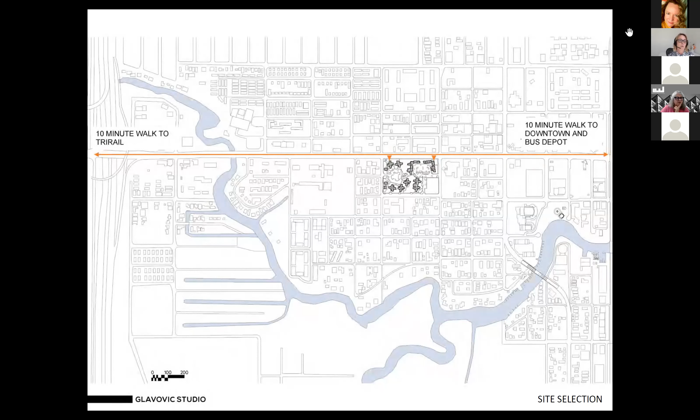Next slide please. In general, our approach to this project was to start with a potential modular design—we actually designed it in concrete modular construction. What was important is, as you'll see, it's about a 10-minute walk to downtown and about a 10-minute walk to Tri-Rail on the west. It's on Broward Boulevard, which is a key connector to the city. Our approach was: how can affordable housing be an exemplary example of how to do urban planning, and how can affordability be not a bad thing, but a good thing?

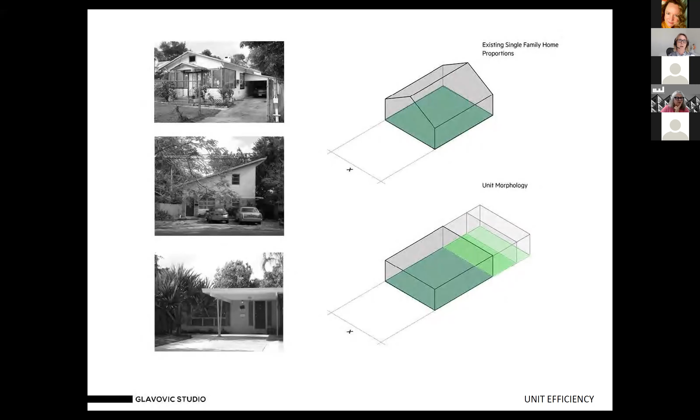Next slide please. I'll show you a few slides of how we approached this. With the sensitivity necessary to develop this project within a historic district, there were also multiple scales we had to look at. We studied the existing typical house in Sailboat Bend and took the width of that, which became the module for the unit. The single unit you see in dark green evolves to a 2-bedroom unit in lime green, and then light green for the 3-bedroom unit. So when we're talking about affordable housing, we always have to contemplate efficiency.

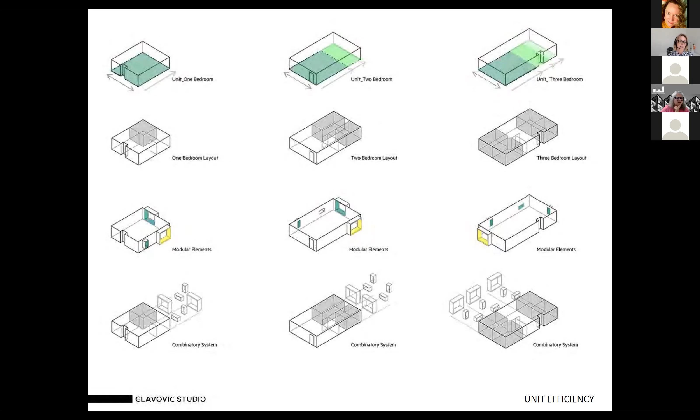Next slide please. You can see how those units could be developed further into other series of modular elements—for example, balconies, window surrounds—and all of these also needed to address extreme climate challenges. The ultimate resiliency of a project is dependent on all of those factors. Next slide please.

One thing we try to keep front and center in all of our projects is the resident—there may be children, seniors, or a young couple in their first home. This is really important because a lot of the conversation around affordable housing tends not to reflect on the humanity of the individuals who need this, who are throughout society and part of us all. Next slide please.

Kennedy Homes ranges from 5 stories to 2 stories. It was really important for us to understand how local construction techniques, keeping the costs down, could be employed to leverage a beautiful project that is a place we would all want to live in. Well-designed architecture is another metric for affordable housing.

This is how we achieved it. What did we have to do to ensure that it was affordable? Well, keeping things below 5 stories, a range from 2 to 5 stories, helps because of the elevator and all the requirements that come with mid to high-rise construction.

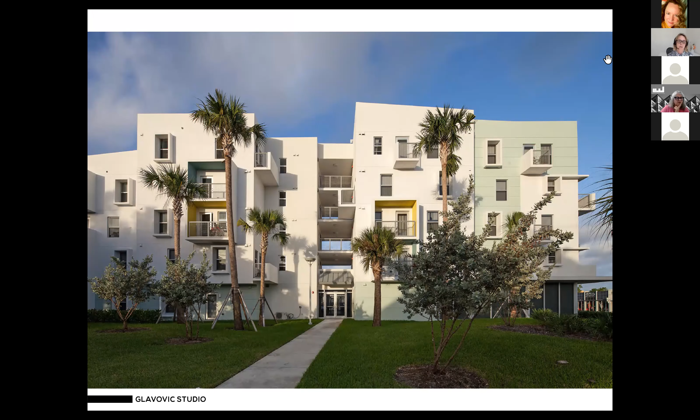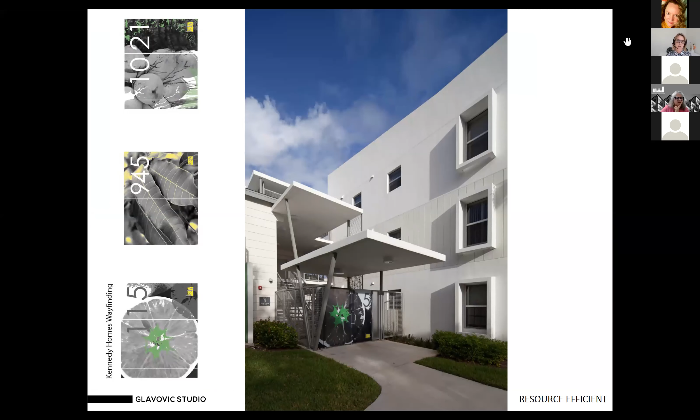Also important was not dismissing or understanding our connection to our roots. We were influenced by Charles McKirahan, a local architect from the 1950s, wanting to celebrate that style while ensuring cross ventilation and open breezeways. These were achievable by using local crafts and construction industry practices, as well as keeping the density of the units in clusters.

I'm going to now talk to you about South River Plaza, which is a larger project that is not built but went through the DRC process. Why would this be a strategy for designing affordable housing and architecture?

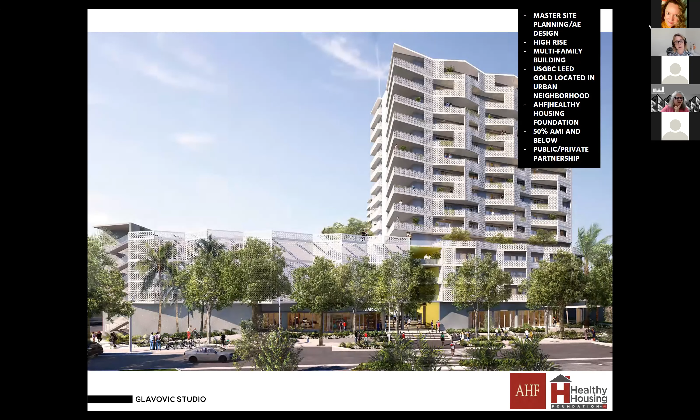Well, we needed to do a certain number of units. It turns out when you do a high-rise project, the costs obviously go up. Therefore the quantity of units was also important, as well as the imperative of looking at what the needs are in any place.

It's important that, and I reference this on each of these slides, I want to give credit to our colleagues, our design partners and owners.

This urban mixed-use campus was located sensibly south of the river and on a transit corridor, which meant folks could walk to work, could walk to shops, and parking wasn't going to be a major requirement in this project.

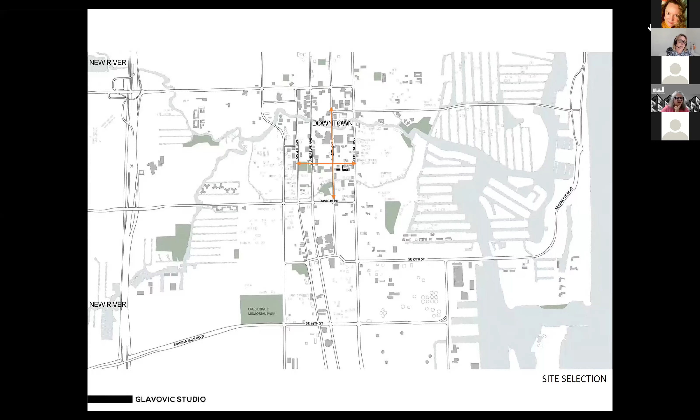An important component in our projects is the micro unit, which we're all familiar with now. But along with that comes the challenge of very interesting architecture. So we try to be very efficient and think of all the components within the unit as modules within another module.

This design turned out not to be able to be competitive with doing modular, volumetric modular in South Florida. So instead we designed a kitchen and bathroom prefabricated module that could be site installed and completed, which accelerated the process.

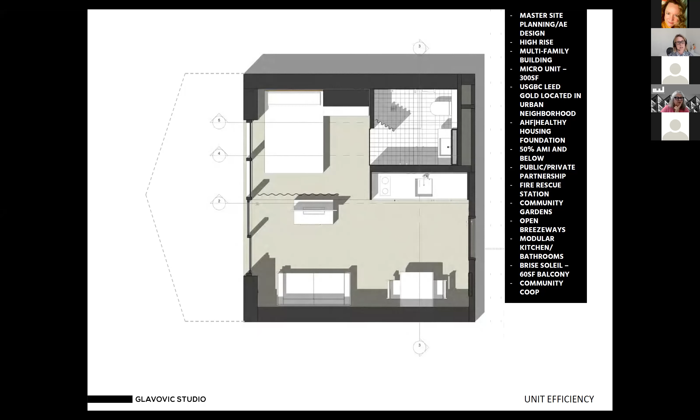Also, as we discussed in Kennedy Homes, another element really important to us is understanding where we are. And well-designed architecture, as we all know, actually yields lower costs to the resident.

Housing security is fundamental in developing and designing affordable housing. It's a strategy that can reduce the long-term costs and rent costs, as well as electricity bills. So using the brise soleil and having balconies that shade orientations on west and east facades becomes essential.

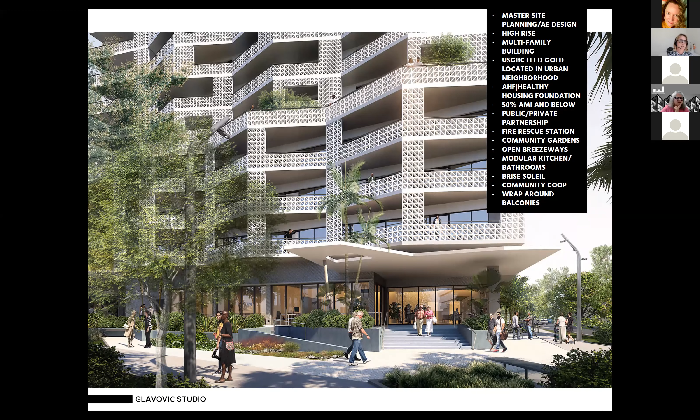Another component helpful in reducing the costs of these projects was developing a public-private partnership with the city where other needs are met. In this case, there was a fire rescue station and a co-op grocery store that contributed to the overall quality of life of the neighborhood, which was an important element to be a part of.

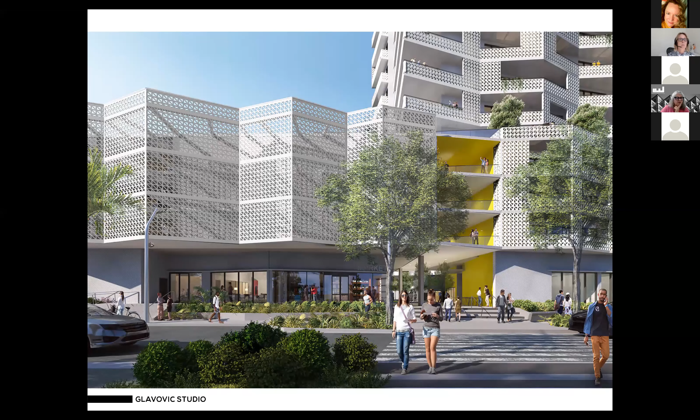A project we're currently working on in the city of Miami is using a very specific task force approach to the entitlement process because of its challenge to both the costs and viability of a project, as well as the diminishment of access to housing quickly due to these complex processes. This is a 12-story project that is essentially 4 stories of parking and 8 stories of residential units, and very efficient. I'll show you a little more about that.

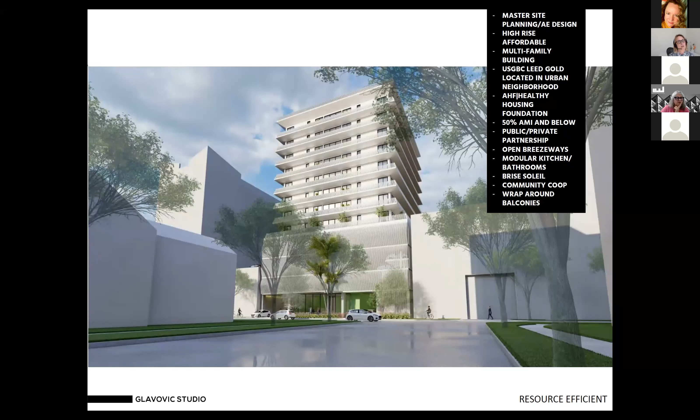It's located in Edgewater. It's an urban infill project. And I think urban infill is another area where, when looking at site selections for your clients and owners, you think about how we can do the other type of architecture that is not the massive development.

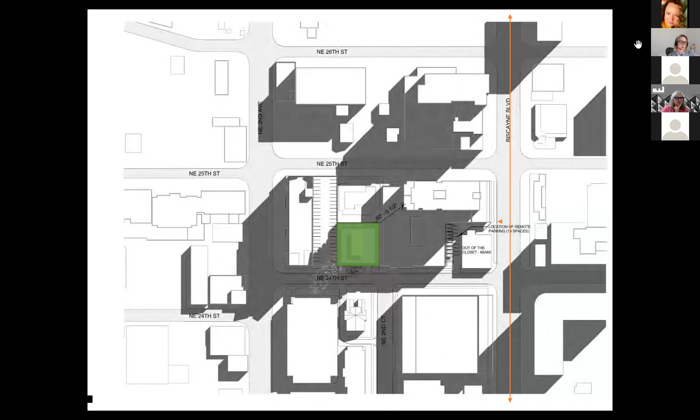What happens, though, is that we are constrained, as you can see in this green square, by the limitations of a quarter acre site, which has to have parking for affordable housing and isn't in a transit-oriented development corridor. So there are many regulatory environments that need to be advocated for change in order to ensure you don't slow down your entitlements process to achieve the required site plan approvals.

Again, the utilization of the micro unit, a repetitive module where everything is stacked and is efficient, still affords someone a full kitchen and bathroom and place to sleep and live. In this case, we also have wraparound balconies to ensure we have coverage and solar protection.

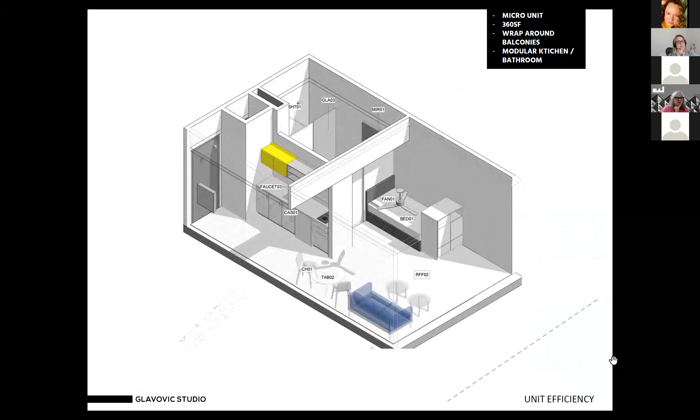The last project I'll talk about is one we're currently working on, two of these actually. This one in Los Angeles is a high-rise volumetric modular building that is highly efficient. The entire tower is all out of modular, about 90% modular with about 10% conventional construction. This is a way to expedite the process of construction. It really increases the quality of the projects as well as reduces our carbon footprint through minimum waste production.

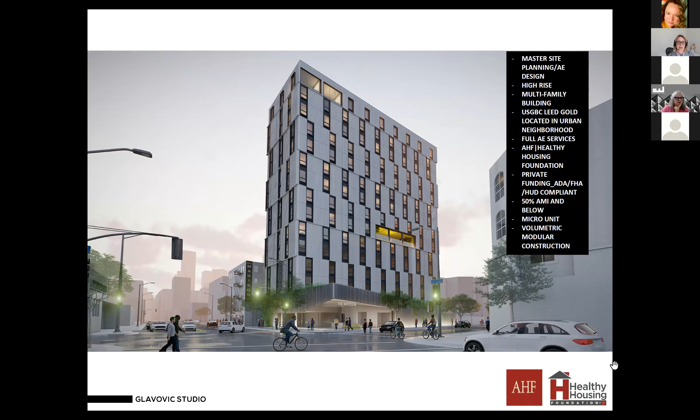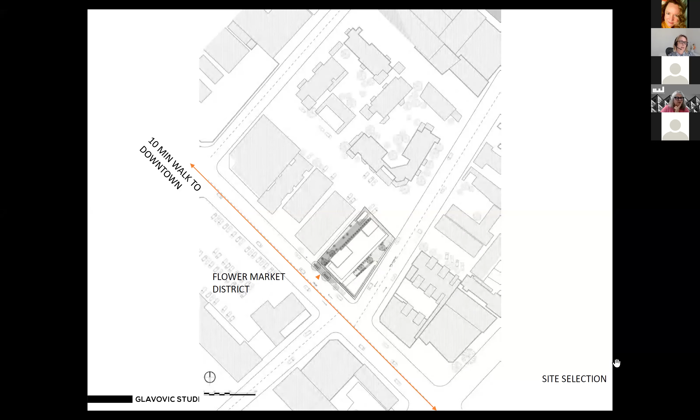This is also located on an important transit corridor for site selection. It is a walkable area. It's in the downtown Skid Row area, which many of you might be familiar with, which is the epicenter of the housing crisis in the city of Los Angeles.

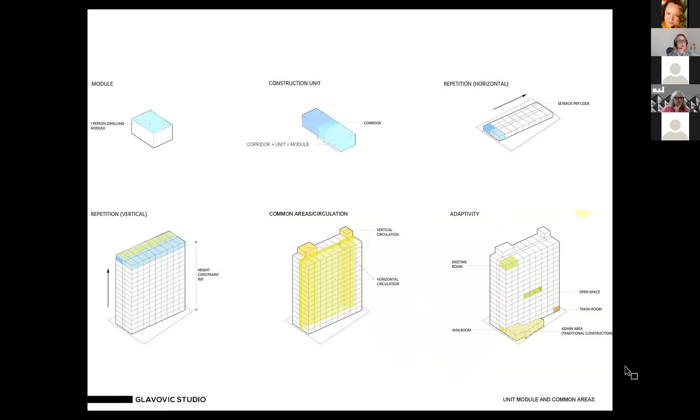Here you can see the unit iteration and how it evolves. Essentially, it's a product, and when designing in modular, the product then has to be very efficient. It's a steel frame chassis where components are introduced all in the factory. In some cases, part of the outside of the facade is done in the field, or it's developed from the factory.

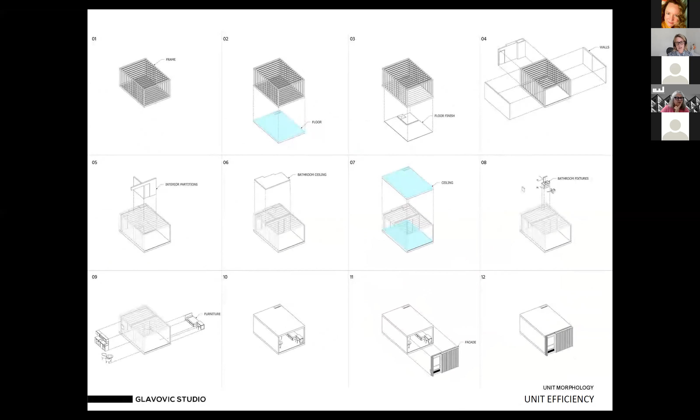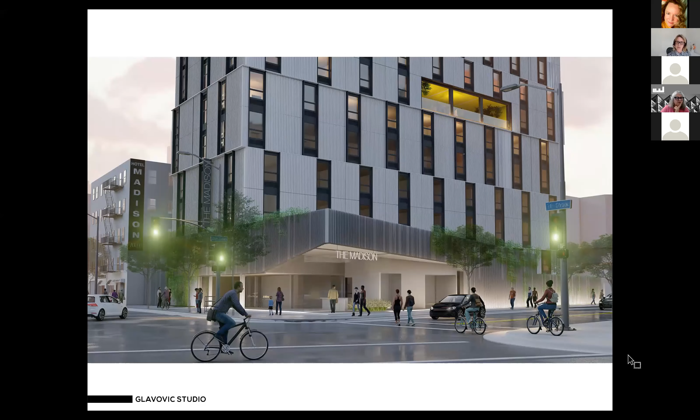The last element I want to address is we've developed a task force approach working with council members and their staff in order to expedite the entitlement process. That is an extraordinary way to reduce costs, and we're also working to reduce fees. Thank you so much. I'm happy to answer questions, and I look forward to listening to my colleagues.

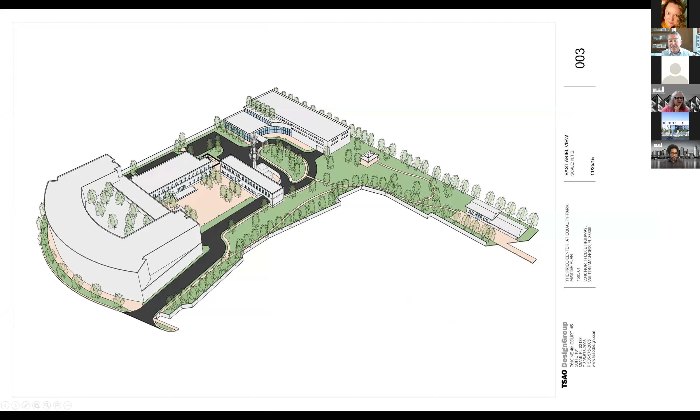So we worked with Carrfour. We interviewed several developers to assist. Carrfour, of course, another not-for-profit organization that has a lot of experience in Dade County. This was one of their first projects in Broward County.

So then in 2019, after much design, at this point I was actually on the board and was brought on to assist with interior design and basically act as an owner's representative, because I was the only one on the board who knew anything about architecture and design, to assist Pride Center and Carrfour in the development of this project.

It's fairly unique because, as you saw, the project is on the Pride Center campus, so there is some shared uses, shared entry, shared parking lot. It made for a very unique experience for both Pride Center and Carrfour, because we were a very active user. Construction began in 2019.

And then in 2020, we accepted applications. There were 48 units that were built, and we received over 1,500 applications. So unfortunately, there's still a huge need in this community for affordable housing, but we're very happy that in December of last year, our first residents moved in.

So you can see in the background of this photo, the housing is on the left-hand side, our existing Pride Center office space, and some community spaces on the right-hand side.

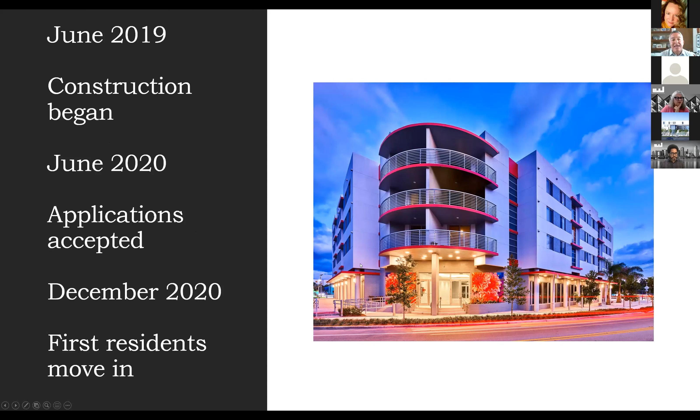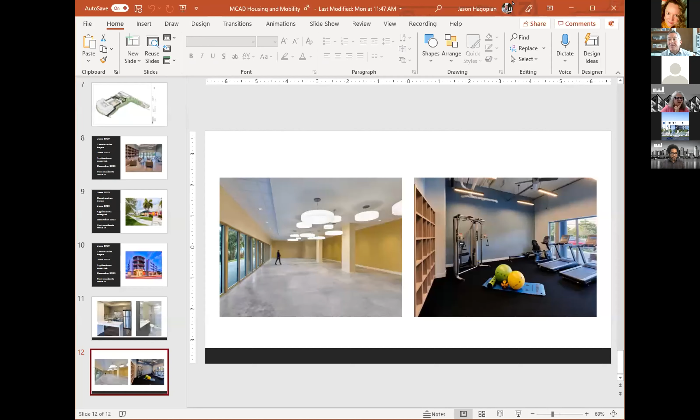I like to think that part of our success was because we didn't really know much about public housing, about affordable housing, and how to build it. We were able to really push some of the limits that may occur in more normal, common public housing or affordable housing projects, because we felt like this was our housing project, here on our campus. And we're very proud of what has been created.

I hope that we can inspire other communities to find ways, if it's a passion project and you want to see this kind of development in your community, you don't have to necessarily be an expert at it. You do have to surround yourself with people that are familiar with this kind of project, but always present challenges. We were constantly pushing the limits with this project in order to get a project that suited our community.

And I welcome any of you to come up and see the project and what we created on our campus, from a group of people that really knew nothing about this type of a project. So thank you very much for your time.

Thank you, Jason, we may need to hold you to that. Just wanted to jump in and say we may need to hold you to that invitation to come and check it out. Well, we would love that.

I'm also going to talk about another project called the Nest. I don't know, there seems to be a theme there of this avian variety, but the point is these two projects—one in Miami Beach and the other in Los Angeles—really come to a head in trying to promote many different aspects around the idiosyncrasy of a community, but also to find better ways to achieve affordability and celebrate high design.

So the first project is the Heron. It's done with the Housing Authority of the City of Miami Beach—as I mentioned, Mike O'Hare is actually on here today. It's on Normandy Isle, and it's for 20 units of senior affordable housing.

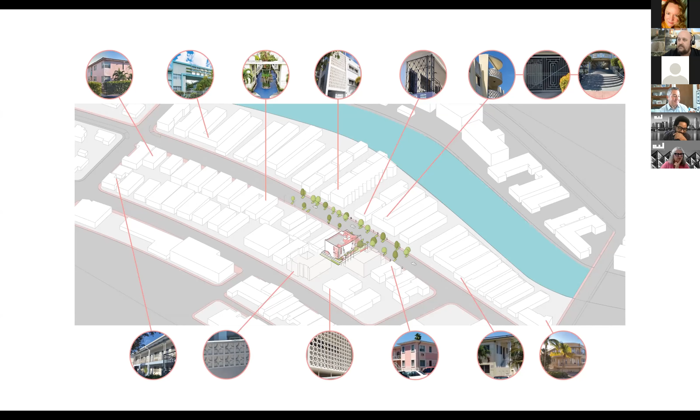We were really inspired—again, just as Margie talked about—by wanting to understand the community and its aspects. We were inspired by the MIMO architecture, Miami Beach Red, and other components, thinking through how to pull in the architecture of the surrounding landscape and integrate it into a sense of place. Because after all, that's what we're trying to do—it's not always place making, but amplifying a sense of place through place keeping and place building. We learned a lot of key lessons from the architecture around this particular project.

Zooming in, the project is on Marseille Drive—20 micro units of elderly affordable housing. We were also very inspired by the breeze block architecture of that MIMO style. This is a simple 4-story structure in the historic overlay district, which gave us several challenges to work through. We're not actually required to have parking, but we did integrate some parking into this project. Essentially all the living quarters are on the 2nd, 3rd, and 4th floors, as well as a community room at the upper level.

This is essential for us because we're having to reconcile a few things. One, we're in a historic district, but also we're trying to deal with challenges around sea level rise, climate change, adaptation. We all know what happened in Hurricane Irma, and this was the incredible lesson from the Housing Authority: this project must operate as a resiliency hub for the individuals we are serving. They need to be able to stay in place and live out the storm.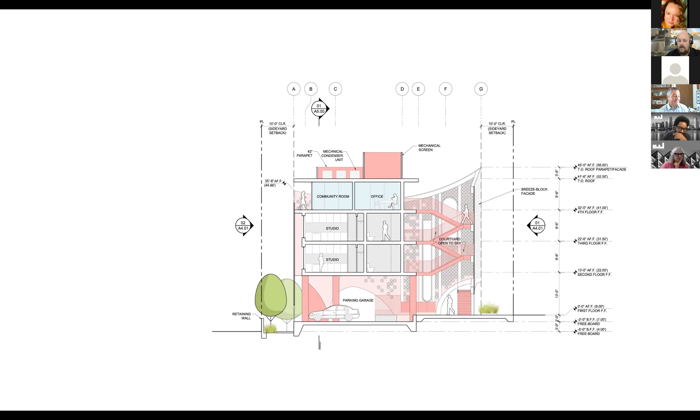As well as begin to integrate it around even potentially after the storm and a lack of power. So we're integrating things like backup generators, but we're also designing this to be passively ventilated through the easterly breezes being harvested through the project.

So this is just an overview looking south back at what that project looks like from Marseille Drive, an image of it from the front side along Marseille Drive.

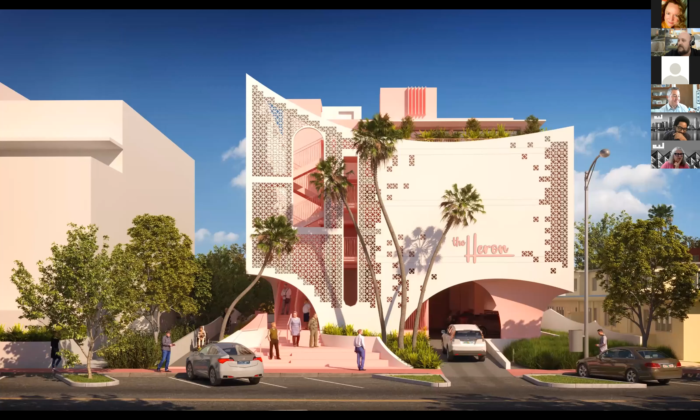So again, even though we're not able to really pull things to the ground level for community spaces and other things, we create these urban stoops, a porch where the elderly can really hang out. And then it moves up to an upper roof terrace at the 4th floor.

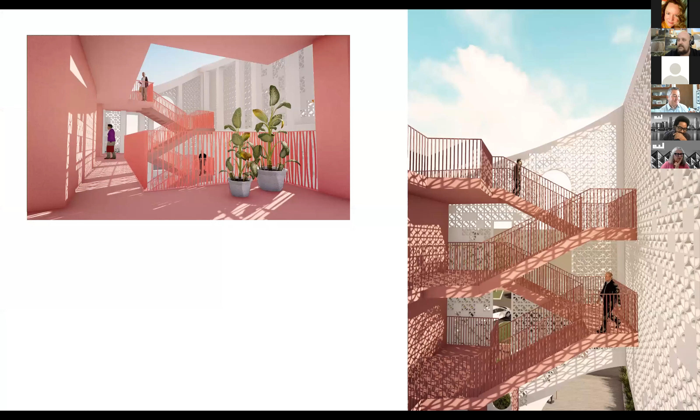And again, you can kind of see that inspiration from MIMO architecture. So this is a view looking at the northeastern corner of the project and that breeze block wall, and some interior views of the common spaces moving up.

Another project I'll briefly touch on today: a few years ago, Los Angeles County came up with a homeless initiative, housing innovation challenge. It was a $4.5 million project put out and pitched for great ideas and collaborations amongst architects, nonprofits, and anybody figuring out how to create a game-changing solution to combat the issues around homelessness in Los Angeles.

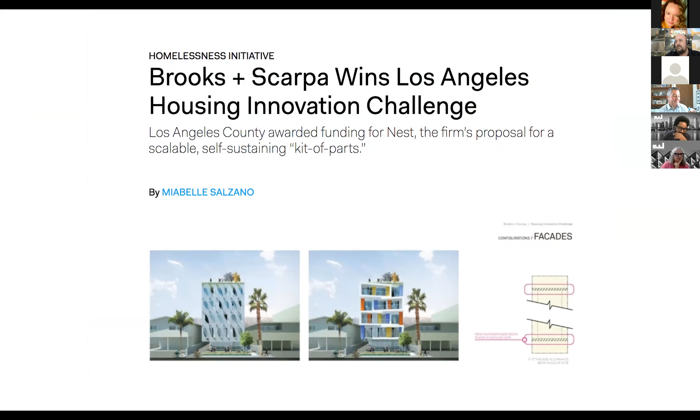We were actually one of the selected firms. We went ahead and worked through this, and it was based on what we called the Nest Toolkit. What we wanted to do was develop a kit of parts. As I mentioned, we have the Heron in Miami, the Nest Toolkit. We're developing 4 different prototypes out of that.

As Margie was mentioning about these already pre-manufactured elements, these pods, if you will, are a product-driven element. So we had 4 of them: the Blue Jay, the Dove, the Osprey, and then these shared space ones. Each one of those gave certain levels of whether it be transitional housing or more permanent housing based on those needs. It was a really complementary toolkit to strategize and begin to think about how we deal with this issue of affordable housing.

Our partners were the Community Corporation of Santa Monica and Plant Prefab out of Los Angeles. So the first thing we did was begin to look at the ubiquitous lot structures in Los Angeles. Quite frankly, we have the same here in Miami, in the Miami-Dade region. But these 150-foot by 50-foot lots are pretty ubiquitous.

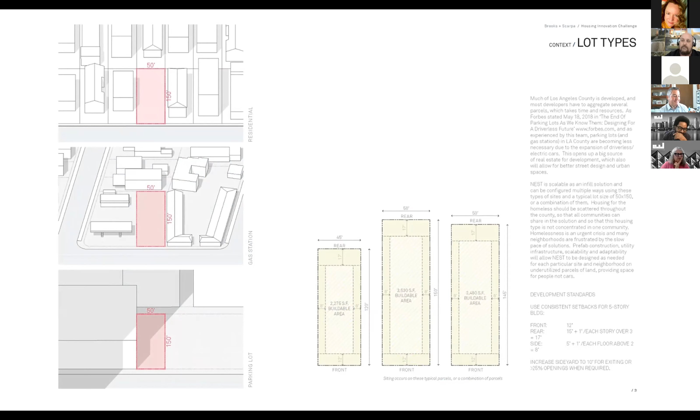We were looking across all the types of cities across Los Angeles County to really develop the best way this prototype can fit, because this is a product that can be rapidly deployable. Anybody can purchase it on this website. But we were looking at single lot, double lot, mid-rise, so you could stack these up to 5 stories tall. These products can go on mat foundations, and there's some other great aspects.

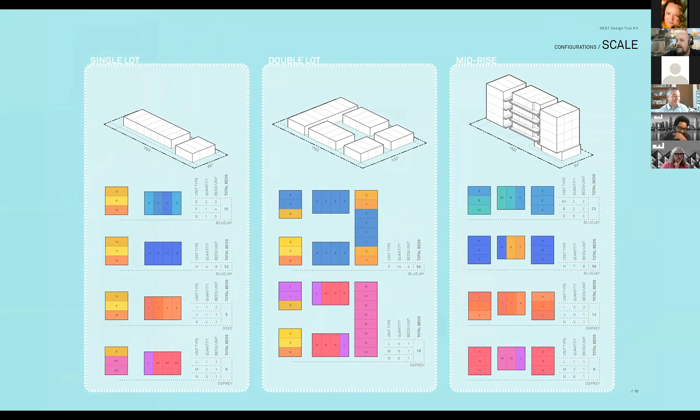When you're starting to think about that modularity in the affordable housing market, we were looking at how it could be deployed into commercial zones, but residential zones. It could take up parking lots, infill lots, or even that mid-rise condition.

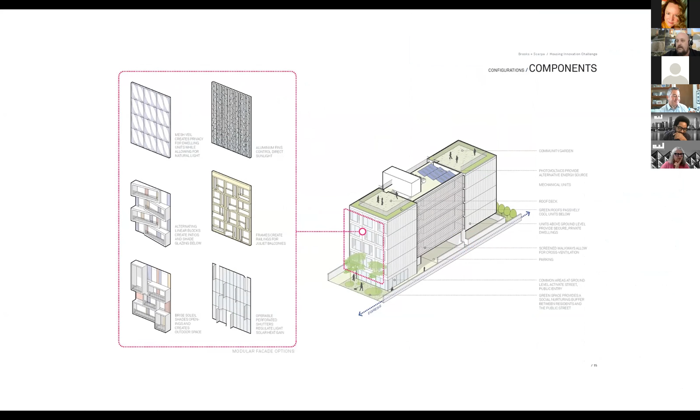One of the things we know is, since it's modular, it can then be modified slightly to take on certain configurations and characteristics for what those facade options could be for our clients and other individuals there. This is just showing some of the options and possibilities of this system, some of the possibilities and options for the facades.

So now what we're really trying to do is Plant Prefab actually offers this. Anybody can go to their website and purchase these modules and bring them onto their site, and then begin to build out some custom features, in this case particularly the facades, and work through that.

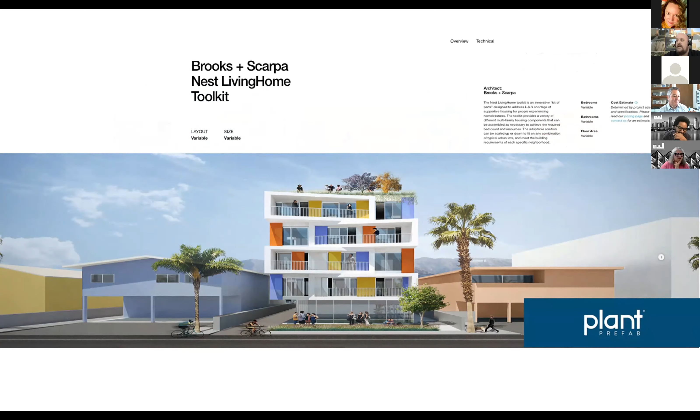Interestingly, Los Angeles has pretty much single family zoning across the entire landscape. They don't have a lot of higher density zoning. So one of the challenges is how do we begin to bring in densification while still meeting the intent of the zoning codes. This is one of the things we need to talk about in affordable housing: policy.

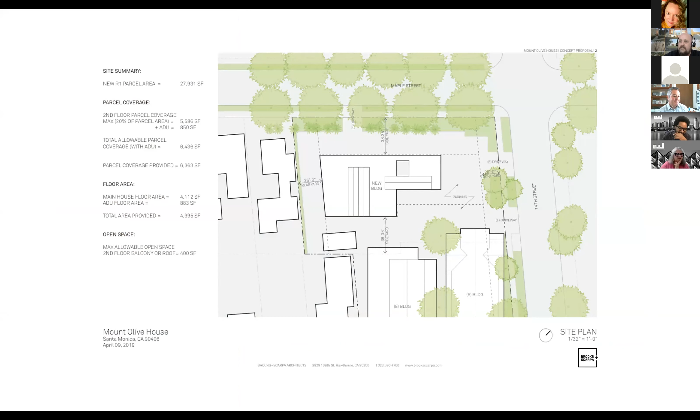Here you can kind of see the plan of this. This is actually elevated over the parking lot. This is what we affectionately called, when sending it through permitting, a 13-bedroom single family house. But it did provide 13 units of beds for folks. This is what it looks like from that, again, elevated over the parking. You can see the existing church in the background on the image at the top, and into this.

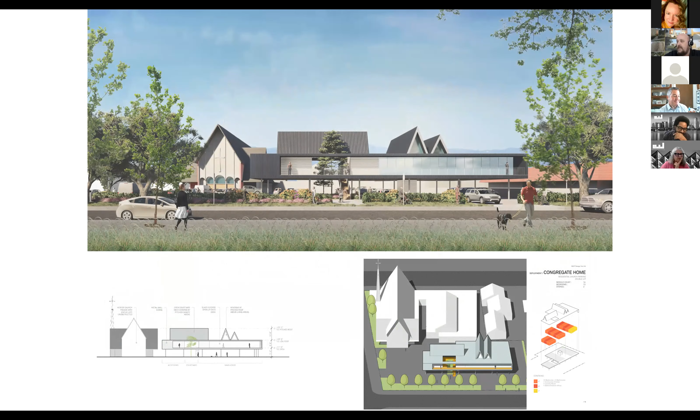I'm going to probably just bypass this video. I was going to show a quick video, but would love to discuss and talk more today.

Are you sure you don't want to show the video? I can share it, Jeff. If you want me to share it, I'll share it. Yeah, sure, go ahead. Okay, don't forget to click those two little things when you share the video, to share the sound. Oh, if there's sound, is it not sharing the sound? Sorry, I don't know, I just thought I'd throw it out there. Let me make sure I'm doing that. Yes, once you hit share on the bottom, there's two boxes. Yep, I got it. One second.